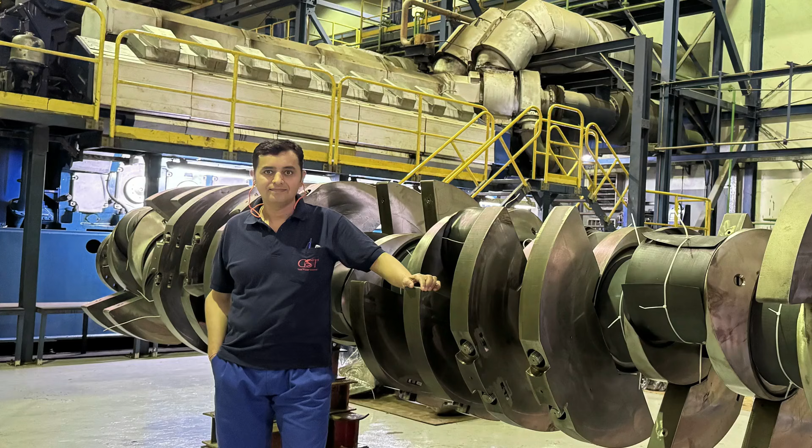You know me well. I am Govind, a PMP certified professional and a mechanical engineer with over 25 years of work experience in power plants and the utility sector.

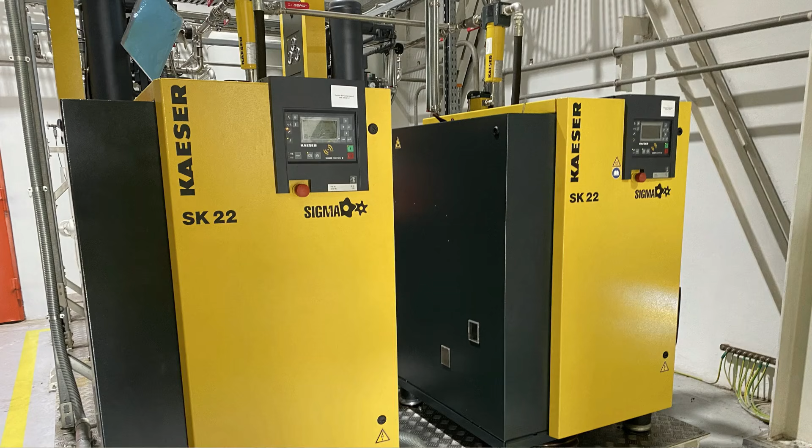Why is mechanical engineering considered an evergreen trade? Let me share my story with you.

After finishing my 12th grade exams in year 1996, I appeared for a state level entrance exam for diploma engineering. And based on my rank, I was allotted mechanical engineering.

At that time, electronics engineering was the most popular branch, and many of my friends had already taken electronics. Honestly, I felt a little disappointed. I thought maybe I should have gone with the trend.

But when my classes started, my professors and seniors changed my perspective. They explained something very important. They told me mechanical engineering is the backbone of all industries. No matter how technology changes, mechanical fundamentals will always be relevant.

Slowly, my thinking changed. Mechanical engineering started fascinating me even more because it is strongly connected to physics, which was one of my favorite subjects in school.

During my diploma engineering, I studied hard and consistently secured the top position in my batch. After that, I completed my BTech in mechanical engineering. Later, I pursued an MBA, earned my PMP certification, and also completed a postgraduate program in project management.

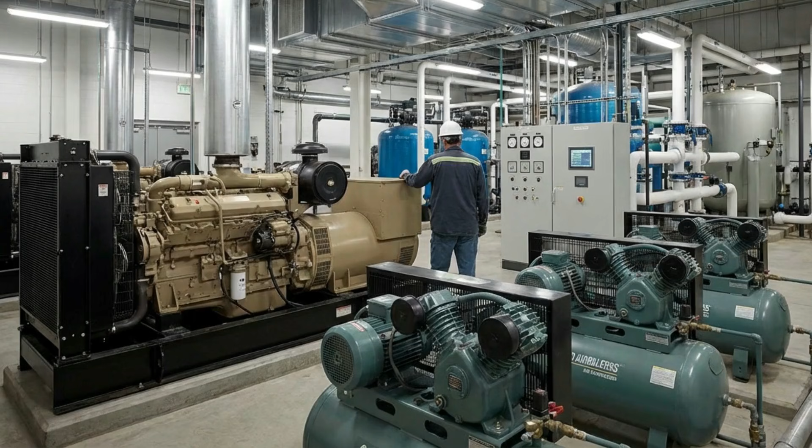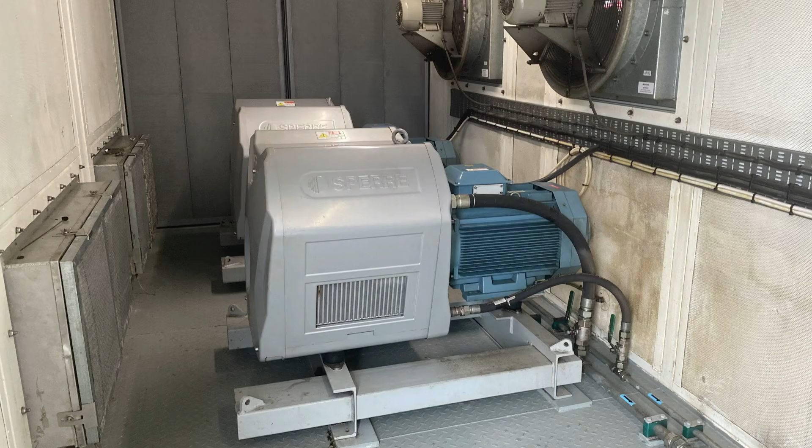My career began in the utilities and power plant sector. I worked with essential systems like gensets, air compressors, water treatment plants, and HVAC systems, which are the real backbone of any industrial facility.

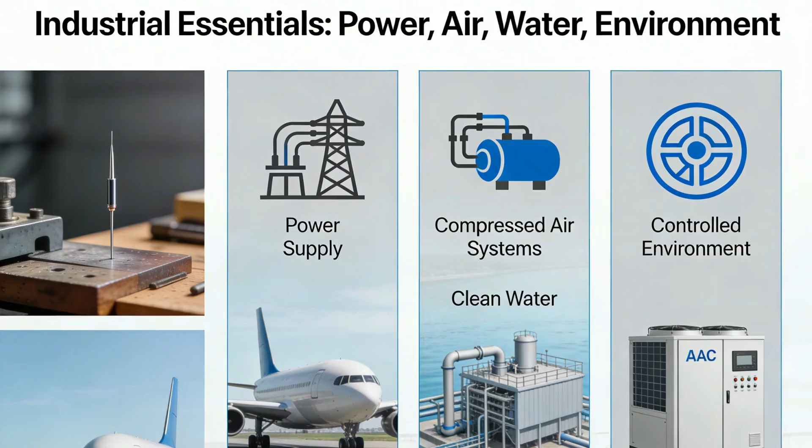No matter what a factory manufactures, whether it is a tiny needle or a massive aircraft, every industry relies on power supply, compressed air systems, clean water, and a controlled environment. These are the fundamental requirements of any industry, just like roti, kapda, or makan are the basic necessities of human life.

Now, coming back to today's topic: why is mechanical engineering considered an evergreen branch?

The purpose of discussing this topic is to give a brief introduction to students who are planning to choose mechanical engineering or those who are already pursuing it. The goal is to boost their confidence and help them understand the vast scope and long-term relevance of this field in the future.

Motion, heat, materials never go out of demand. Motion means anything that moves: machines, vehicles, fluids, even mechanisms inside a factory or a power plant. Mechanical engineers study motion through subjects like dynamics, kinematics, and mechanics of machines.

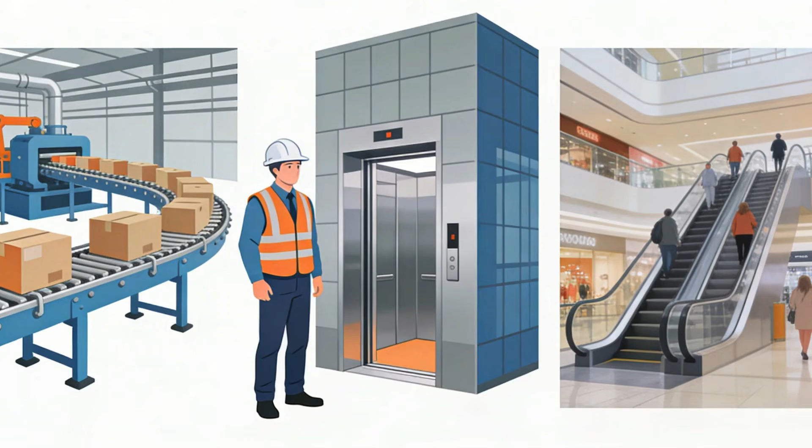Every car engine, wind turbine, or robotic arm involves controlled motion. From conveyor belts in factories to elevators in buildings and shopping malls, all need mechanisms that move efficiently and safely. Without motion, nothing would operate. Every moving system needs design, analysis, and maintenance, and this is the core work of mechanical engineers.

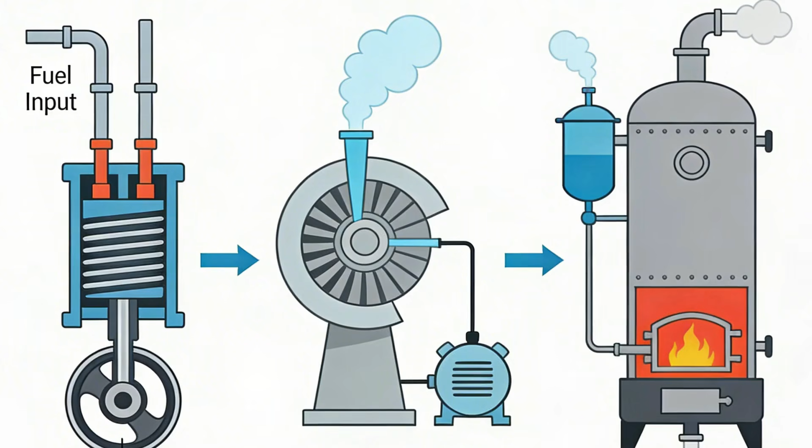Mechanical engineers deal with thermodynamics, heat transfer, and fluid mechanics to design systems that convert and manage energy effectively. Engines, turbines, boilers, they all convert fuel into useful work. HVAC systems maintain temperature comfort in buildings. Refrigeration, air conditioning, heat engines, all revolve around heat management.

If we talk about materials, these are the foundation of all physical systems. Mechanical engineers study subjects like material science and strength of materials, which help them select the right metals, polymers, or composites for each application.

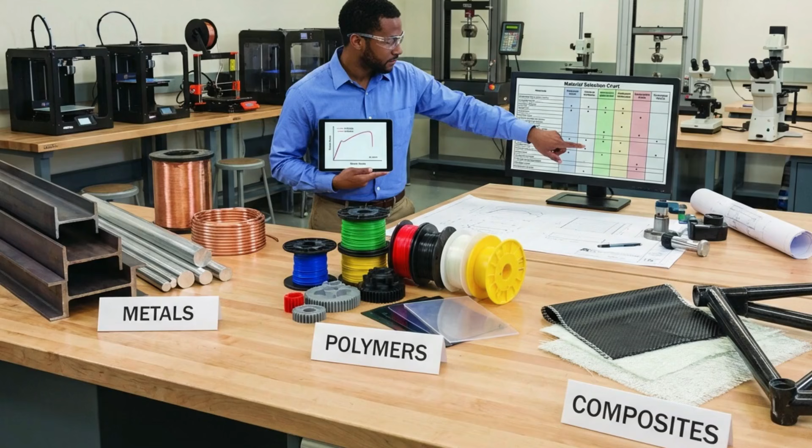Works across industries, not one trend. This means mechanical engineering knowledge and skills are not limited to one specific industry or trend. They are applicable across multiple sectors, from traditional manufacturing to modern renewable energy. Mechanical engineers are valuable in every era, regardless of changing technologies or market fashions.

You might have noticed most branches of engineering, like computer science or electronics, rise and fall with specific market trends. For example, when software and AI are booming, IT engineers are in high demand, and when automation slows down, demand may temporarily dip. But mechanical engineering is not tied to any single industry. It serves as the foundation for almost every type of production, power generation, or infrastructure activity.

Field plus desk, strong, stable careers. Mechanical engineering is a blend of field work and desk work. It doesn't restrict you to one environment. You can design a machine on your computer and later see it come to life on site. This mix of practical and analytical experience makes mechanical engineers versatile, grounded, and valuable in every phase of a project.

Let's talk about the core fundamentals of mechanical engineering. These are the subjects, the backbone, the foundation that build a strong mechanical engineer. If your basics are strong in these areas, your career will always stand strong. Let's understand them one by one.

Thermodynamics. This is the study of energy, heat, and work. It explains how energy transforms from one form to another, whether it is an engine, turbine, power plant, refrigeration system, or HVAC. Thermodynamics is working behind the scenes. If you understand thermodynamics, you understand how power is produced and utilized.

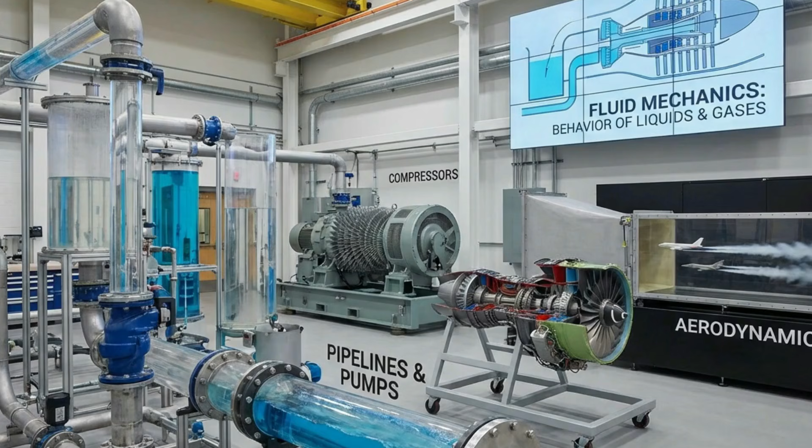Second is fluid mechanics. This subject deals with the behavior of liquids and gases, both at rest and in motion. Any system where fluids flow or exert force depends on fluid mechanics. Pumps, compressors, pipelines, aerodynamics, all are based on this core concept.

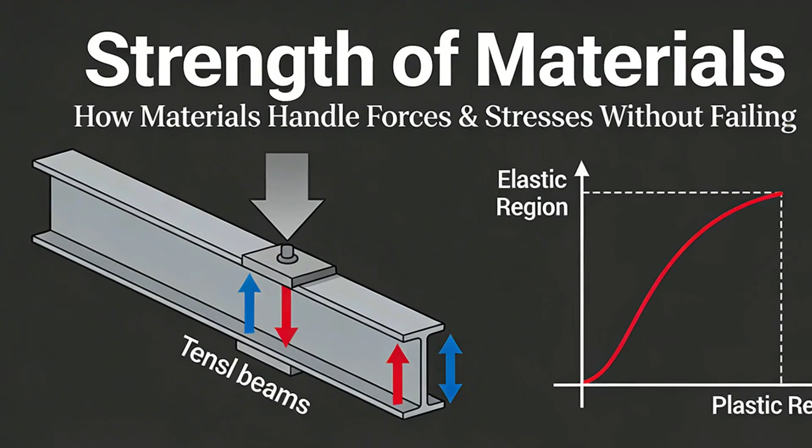Strength of materials. This subject teaches us how materials handle forces and stresses without failing. Whenever we design shafts, beams, bridges, frames, or pressure vessels, we must ensure they don't break or deform. That confidence comes from strength of materials.

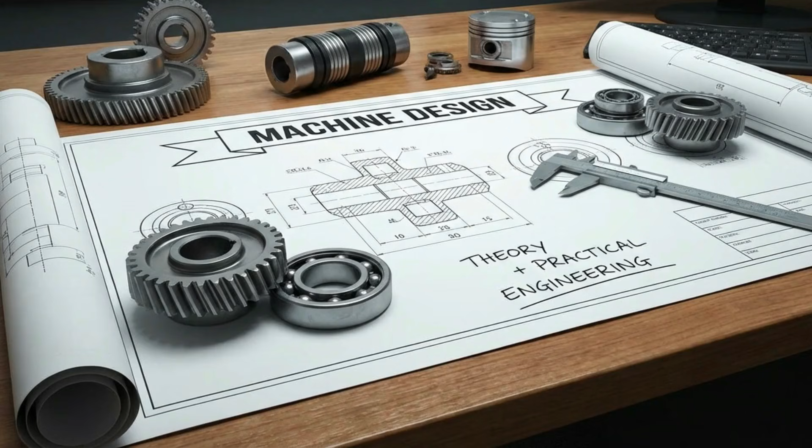Machine design. Here we learn how to design mechanical components safely and efficiently. Gears, bearings, couplings, engines, mechanisms, everything must be designed for performance and reliability. So this is where theory meets practical engineering.

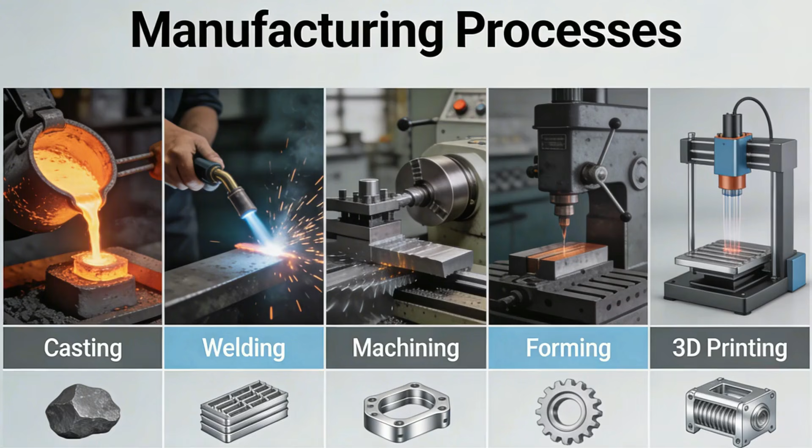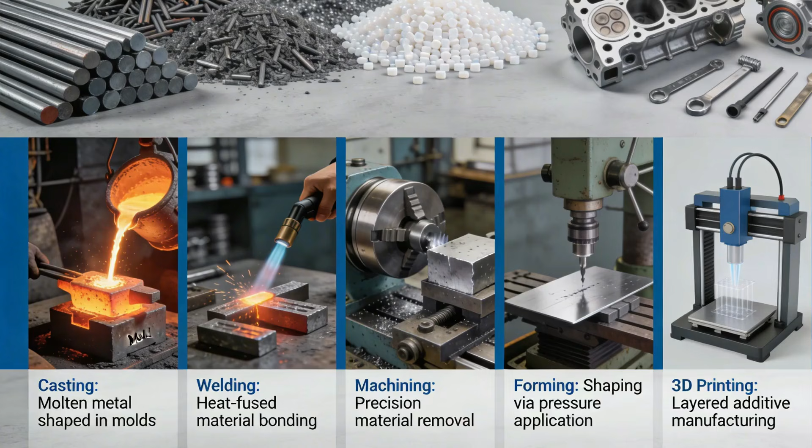Then comes manufacturing processes. This subject explains how raw materials are converted into finished products. Casting, welding, machining, forming, even 3D printing all fall under manufacturing. Because designing something is one thing, but producing it efficiently is another skill altogether.

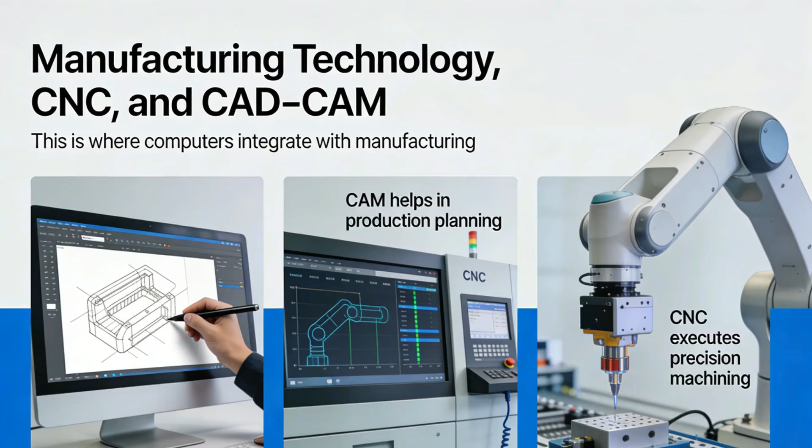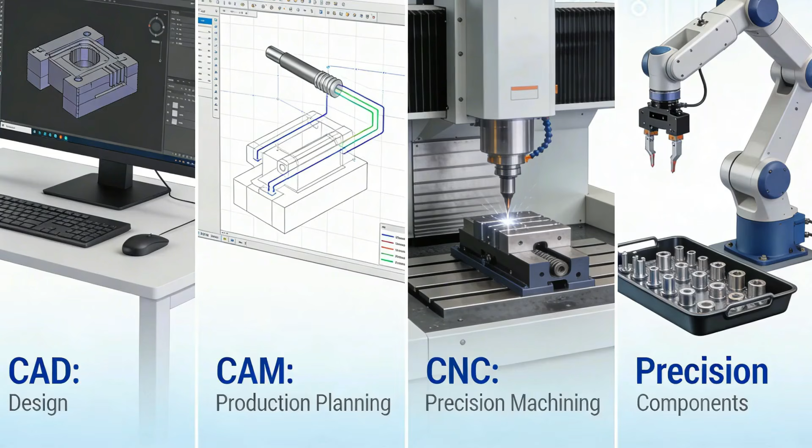Manufacturing technology, CNC and CAD CAM. This is where computers integrate with manufacturing. CAD helps in design, CAM helps in production planning, and CNC executes precision machining. Robotics, automation, precision components. This is the future ready side of mechanical engineering.

Next, material science. This subject teaches us about material structure, composition, and properties. Choosing the right material is critical. Tool steels, composites, special alloys, lightweight materials all require deep understanding of material science.

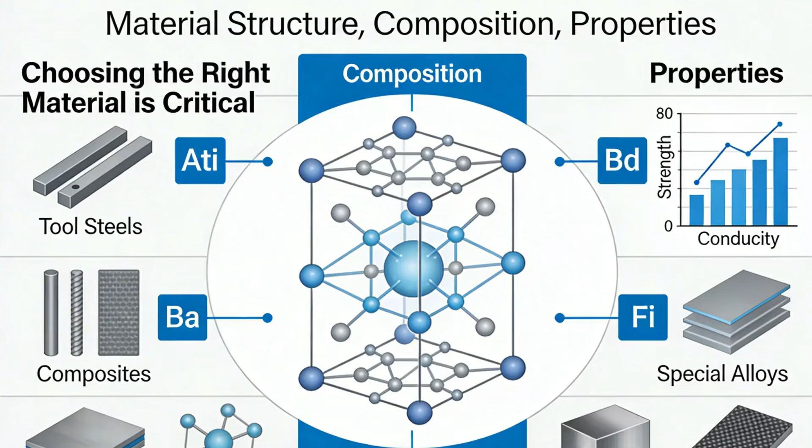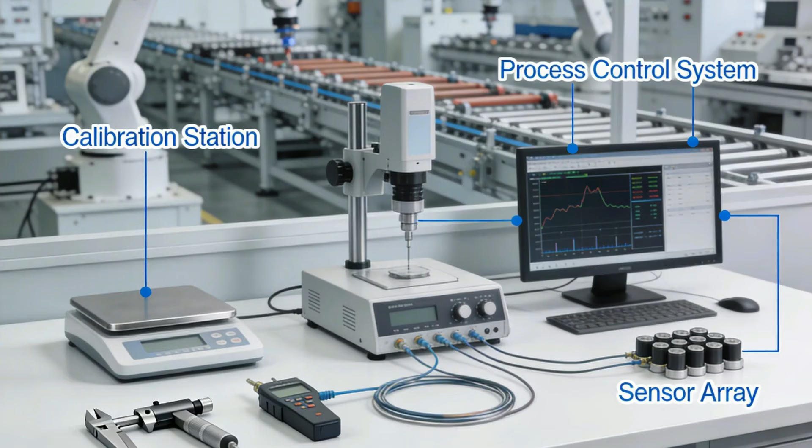Metrology and instrumentation. This is all about measurement and accuracy. Inspection, calibration, process control, sensors. The quality depends on precise measurement. If you cannot measure correctly, you cannot manufacture correctly.

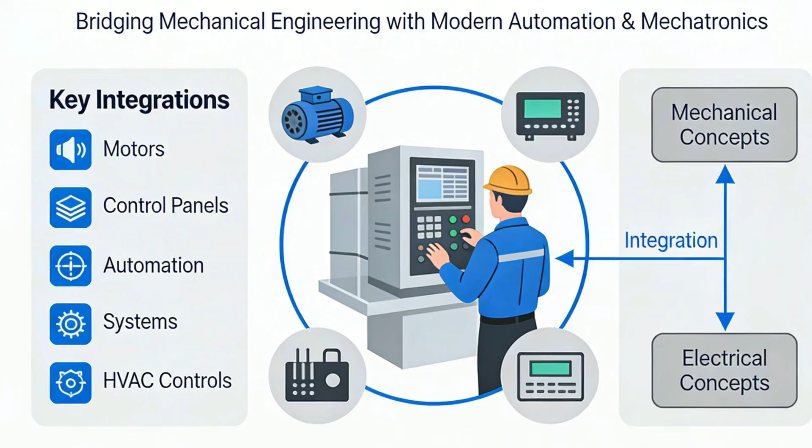And finally, basic electrical and electronics for mechanical engineers. Today, mechanical engineering is not isolated. Motors, control panels, automation systems, HVAC controls, everything integrates mechanical with electrical concepts. This subject bridges mechanical engineering with modern automation and mechatronics.

Now let's talk about the sectors where mechanical engineers can build their careers. The range is massive, and each sector gives you a different platform to apply your core fundamentals. Let's explore them one by one.

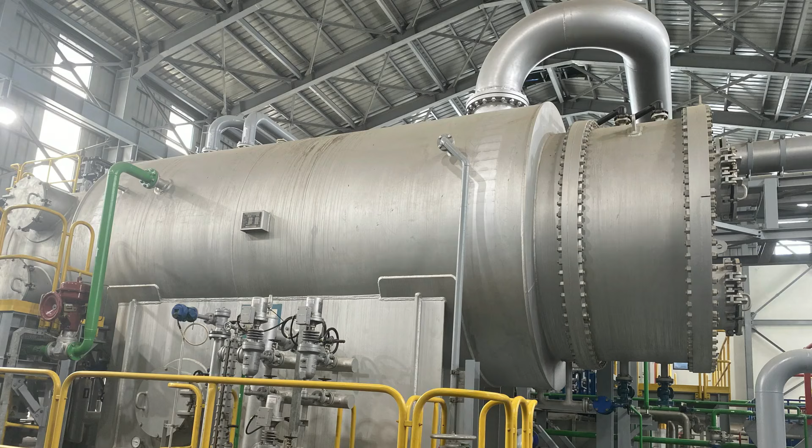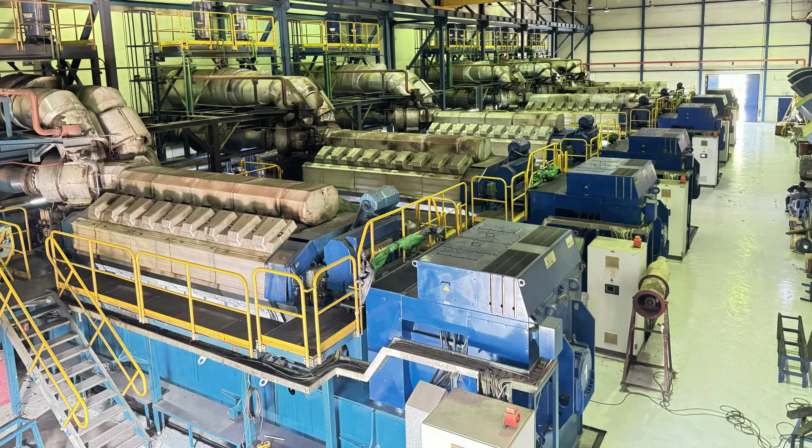Power and renewables. I have spent more than 25 years in this industry. I have worked in base load power plants with capacities exceeding 100 megawatt, plants that run continuously to supply electricity to cities and industries. These facilities are equipped with large bore engines operating on diesel, heavy fuel, and natural gas. And believe me, when such machines run, they are not just engines, they are mechanical masterpieces.

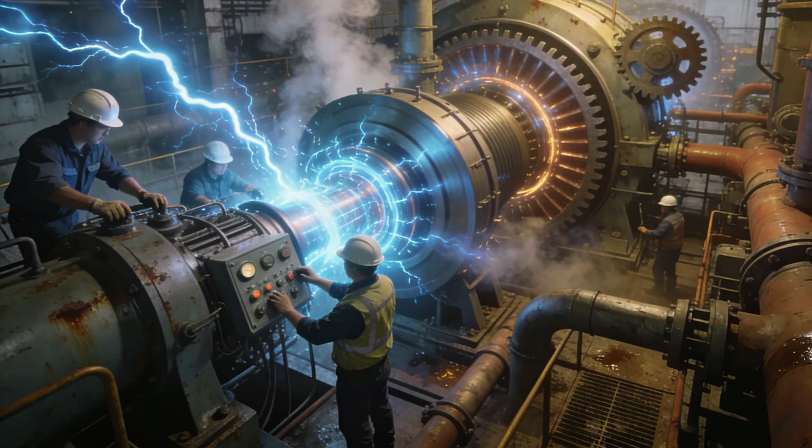Mechanical engineers are the backbone of energy generation. We design and maintain turbines, boilers, engines, wind turbines, and solar mounting structures. From thermal power plants to renewable energy projects, we ensure industries and cities get reliable and sustainable power. Energy drives the world, and mechanical engineers drive energy systems.

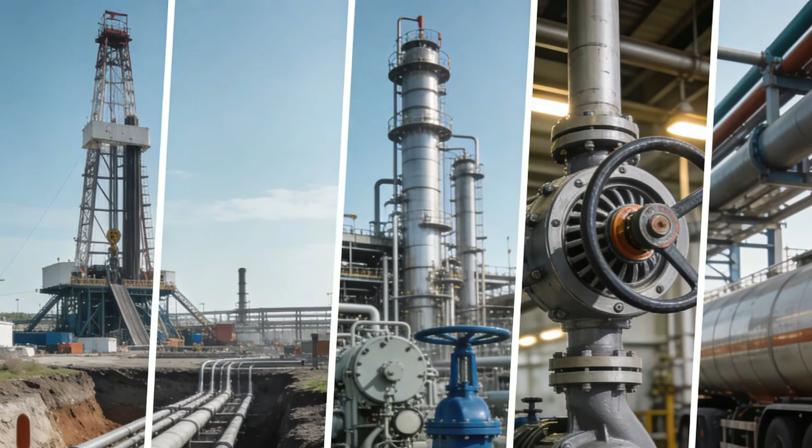Oil and gas. This sector deals with piping systems, pumps, compressors, and rotating equipment. From extraction to refining to transportation, mechanical engineers ensure safe and continuous operations. Without this sector, global fuel supply would stop.

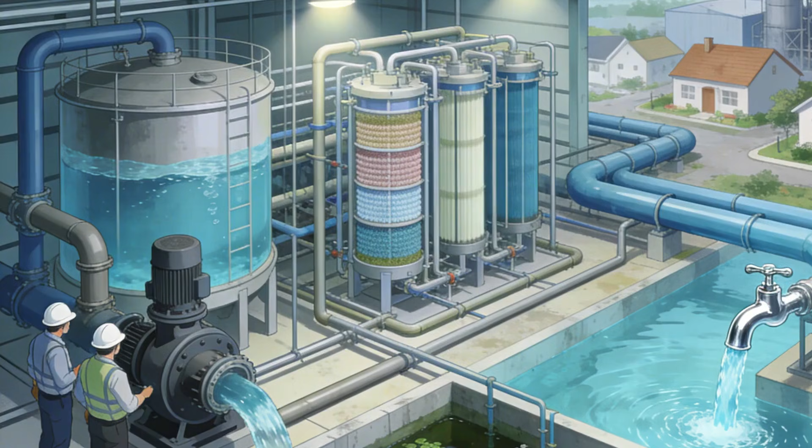Third, water and wastewater. Here, engineers design pumps, treatment plants, filtration units, and pipeline networks. We ensure clean drinking water reaches homes and industries, and we protect the environment through proper waste treatment systems.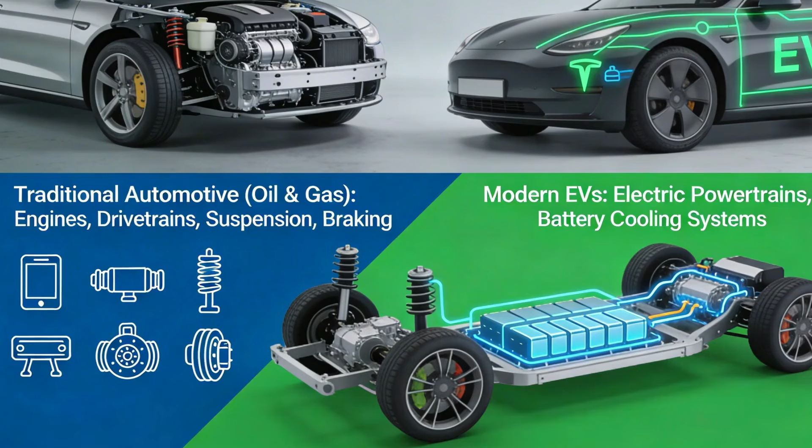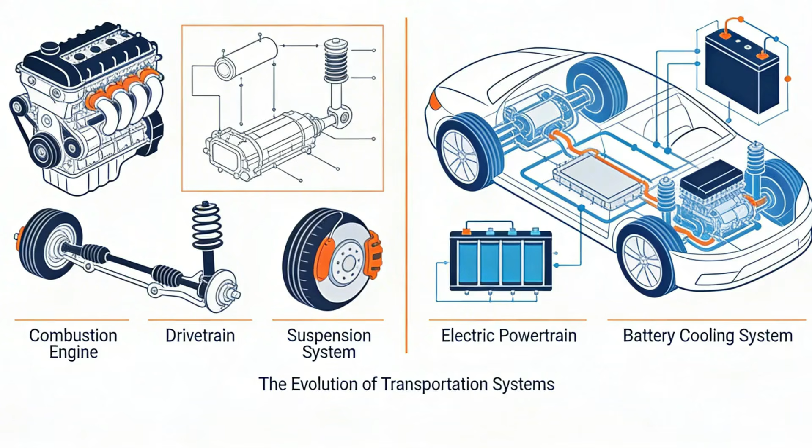Next, automotive and electric vehicles. Traditionally, mechanical engineers designed engines, drivetrains, suspension systems, and braking systems. Today, the focus is also on electric powertrains and battery cooling systems. From conventional cars to EV innovation, mechanical engineering is at the center of transportation evolution.

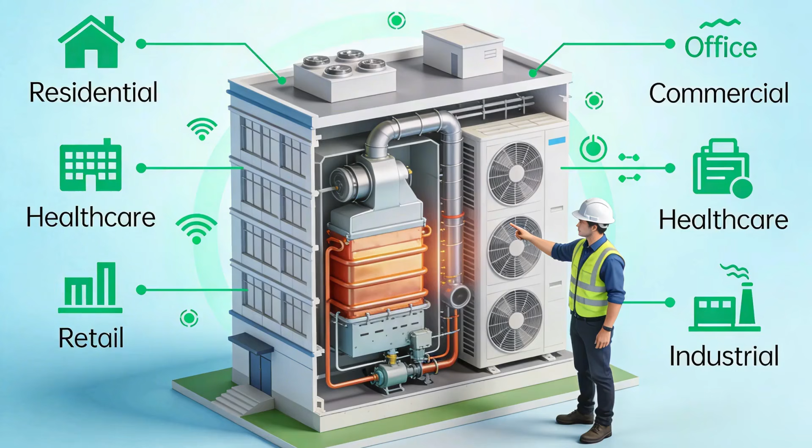HVAC and building systems: heating, ventilation, and air conditioning. This sector ensures comfort, air quality, and energy efficiency in homes, offices, hospitals, malls, and industries. If you walk into a building and feel comfortable, think confidently that a mechanical engineer designed that environment.

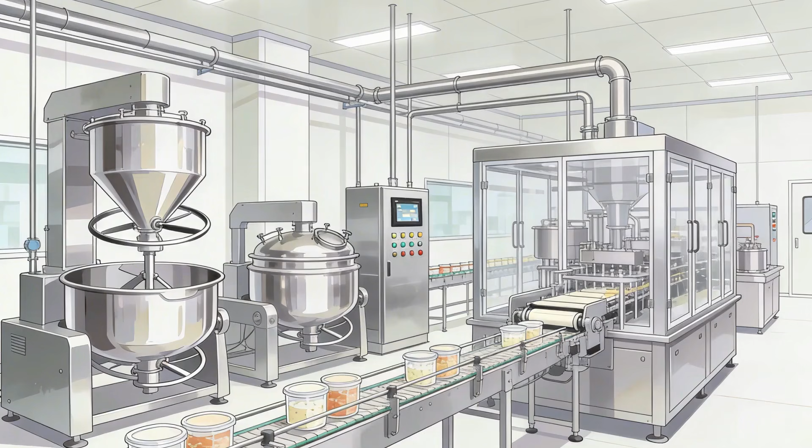Food and pharmaceutical industry. Mechanical engineers design mixers, conveyors, processing equipment, and hygienic systems. In this sector, precision and cleanliness are critical. We help ensure safe production that meets strict hygiene standards.

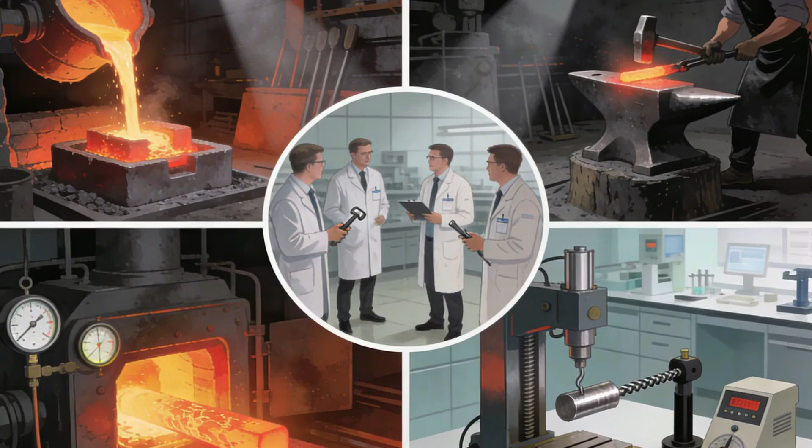Then comes materials and metals. This includes casting, forging, heat treatment, and material testing. Mechanical engineers develop stronger, lighter, and more durable materials. And remember, every other engineering sector depends on materials. So this is a foundational industry.

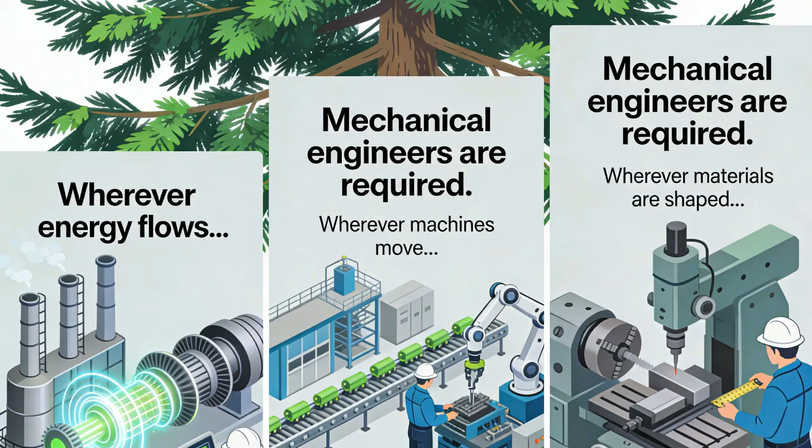And finally, aerospace and logistics. From aerodynamic design to propulsion systems, from lightweight materials to warehouse automation, mechanical engineers help enable safe air travel and efficient global supply chains. So, in simple words, wherever energy flows, wherever machines move, wherever materials are shaped, mechanical engineers are required. And that is why this branch is truly evergreen.